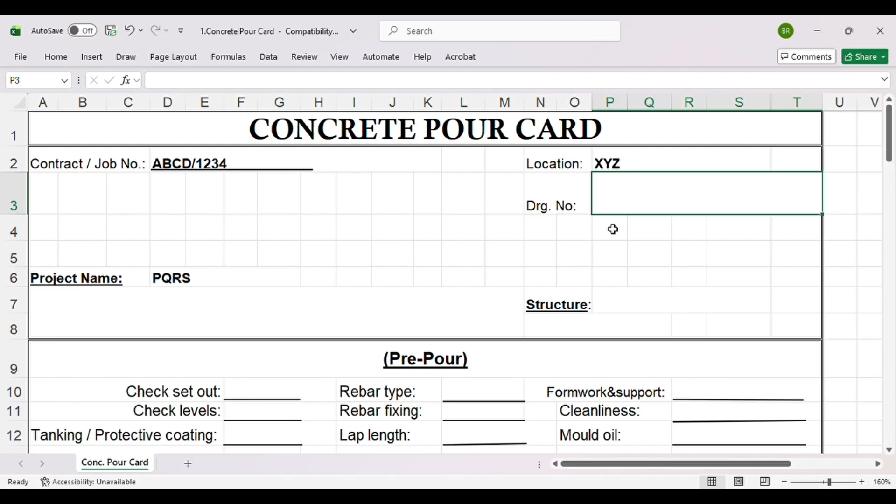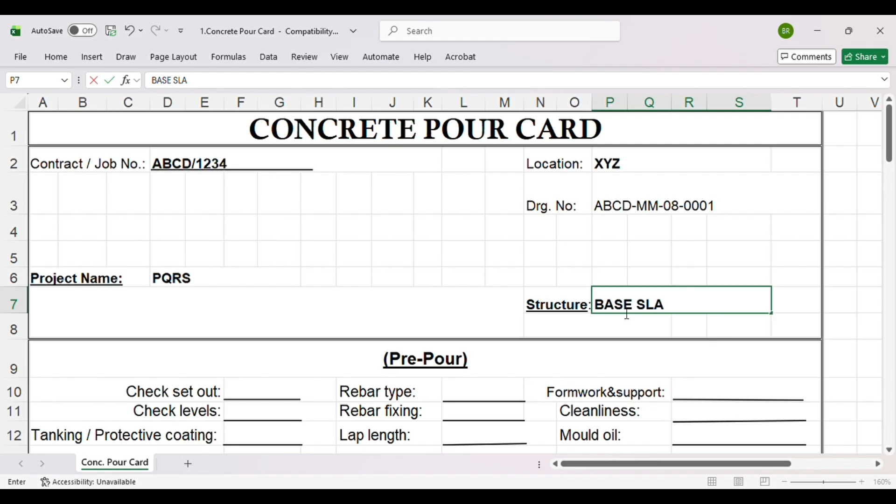First, contract / job number. We cannot put the exact contract and job number, so this will be, for example, A, B, C, D. Contract number and job number is 1, 2, 3, 4. Location may be X, Y, Z, and project name P, Q, R, S. This is also for example. Then drawing number is also for example A, B, C, D hyphen MM hyphen 08 hyphen 0, 0, 0, 1. Then structure we will take as base slab of culvert, for example.

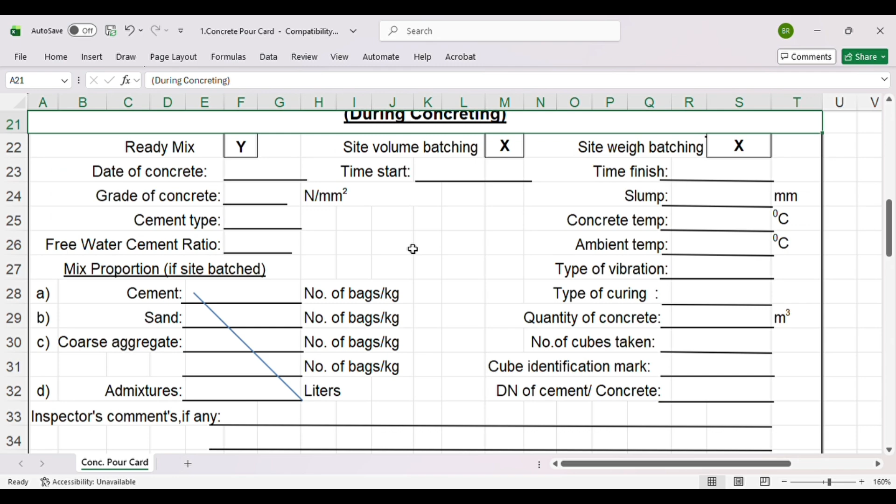Then there are three stages, as I already told: pre-pour, during concreting, and post-pour. So pre-pour, check set out. It will be checked; this checking is required. Then check levels, checked. Then tanking, because this is pre-pour, here it will be not applicable. Same, vapor barrier also not applicable. Then expansion joint filler, because this is first pour, it will be not applicable. Waterstops, if it is not required, then not applicable.

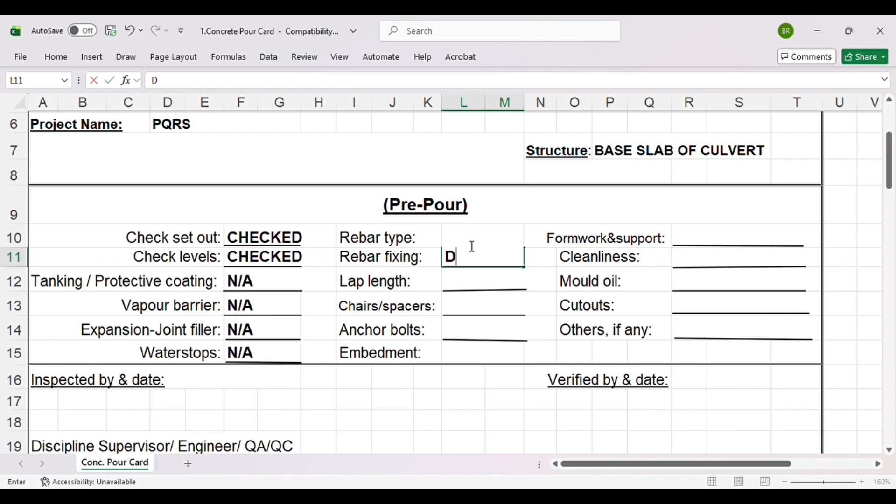Rebar type will be HYSD, and then rebar fixing done. Lap length, if it is more than standard steel length, then lap length provided, or if it is less, then it will be not applicable. Same, chair and spacer, not applicable. Anchor bolts, if applicable, then provided. Or embedment, if it is not applicable, then not applicable, otherwise done.

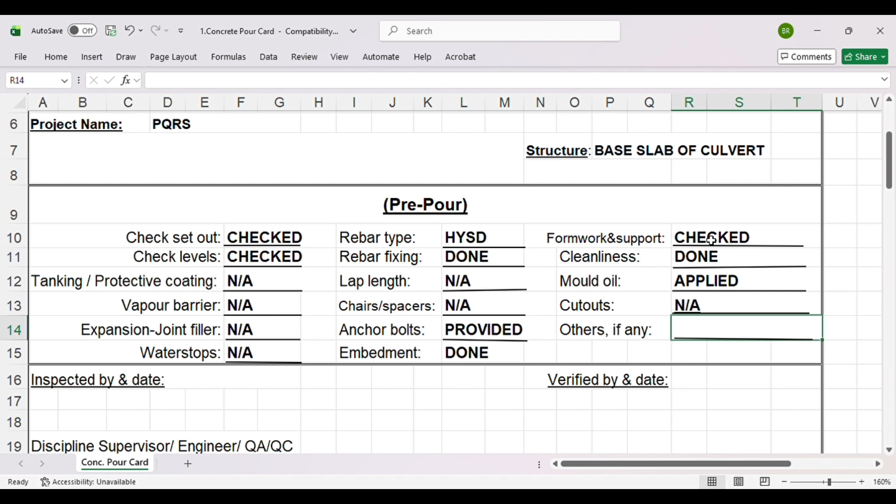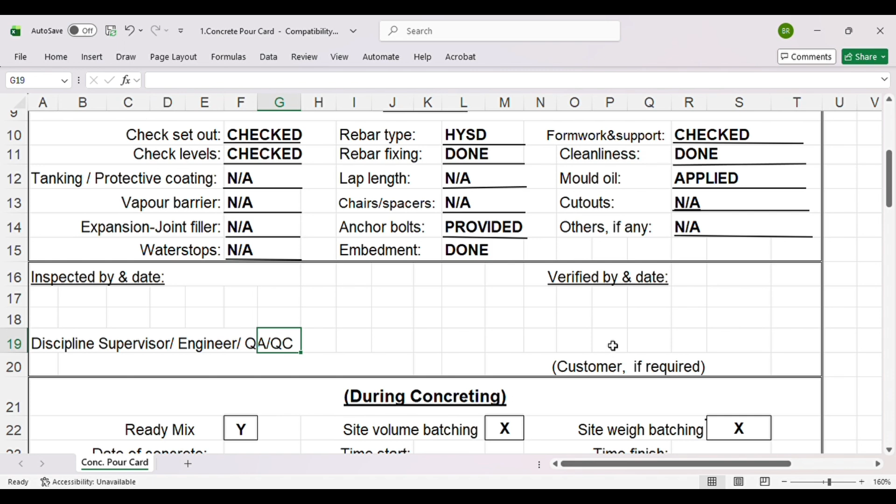Then formwork and supports, obviously required, checked. And cleanliness is done. Then mold oil applied. Cutouts, if there is no cutout, then not applicable. And any others, if not applicable, then not applicable. So this was pre-pour. It may be inspected by anybody, either supervisor, engineer, or QAQC. All three can sign here, or any one of them can sign here. Then if verification is required by the client or customer, he will sign, otherwise not required.

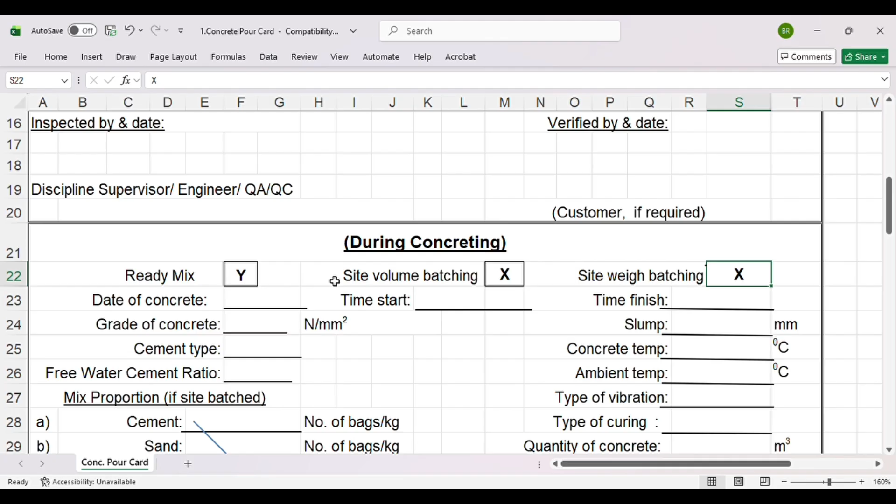Then during concreting, ready mix. In most projects only ready mix concrete is required. Site volume batching and site weigh batching are not required, but it depends on project requirement. Date of concrete, for example, 01/01/2026, 1st January 2026. Then time, 10 AM. Time of finishing, if it finishes within half an hour, then 10:30 AM. And grade of concrete, for example, 40 Newton per mm square.

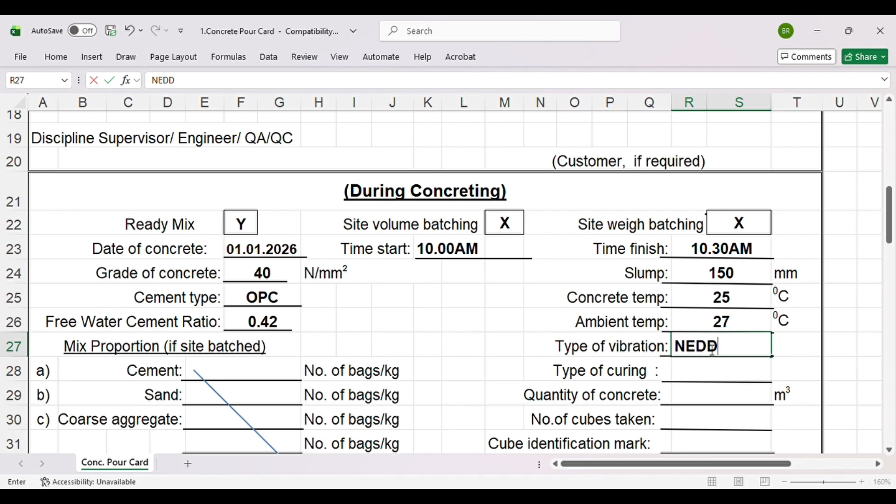Cement type OPC, and free water cement ratio 0.42. These figures are all taken as an example. Then slump, it may be 150. And concrete temperature, in the month of January, concrete temperature is required to be less than 32 degrees Celsius, so for example, it is 25. Then ambient temperature may be 27. Type of vibration, in most cases a needle vibrator is used, so needle. And type of curing, water, whatever is applicable in the project.

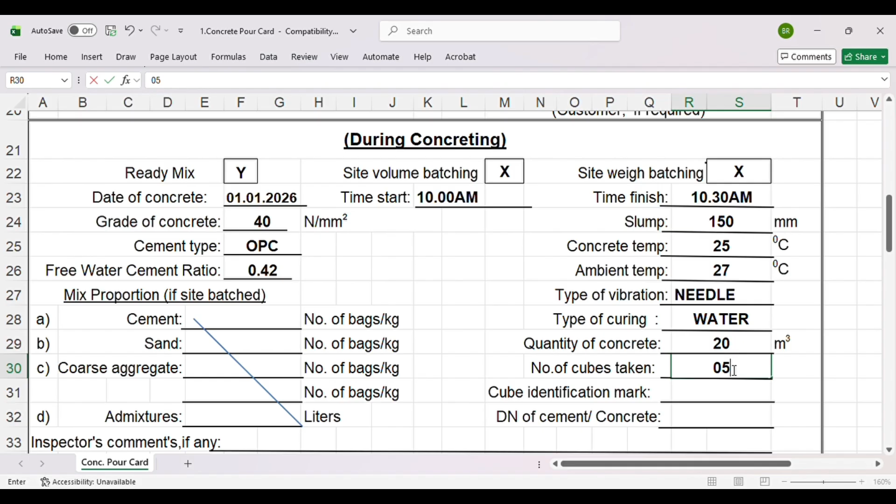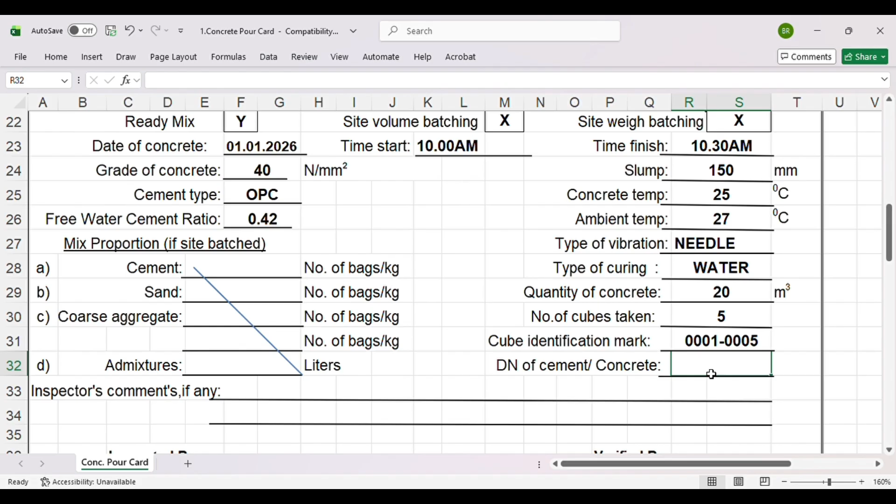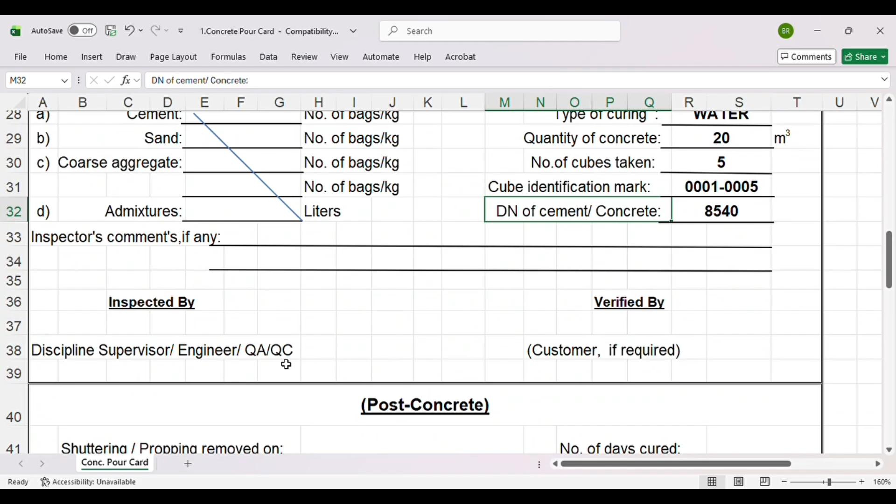Quantity of concrete, for example, 20. The number of cubes taken: normally up to 30 cubic meters one set is taken, so for example, one set of 5. Cube identification, for example, this is the first day, so we'll take 0001 to 0005, 5 cubes. Delivery note, for example, 8540. This is from the batching plant. So this is during concreting. Then anybody can sign here, and if required, the client can also verify. If not required, then not necessary.

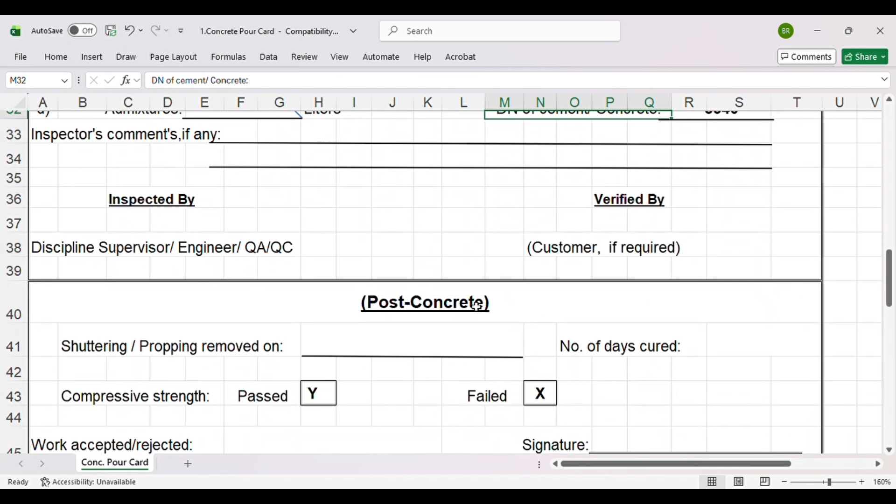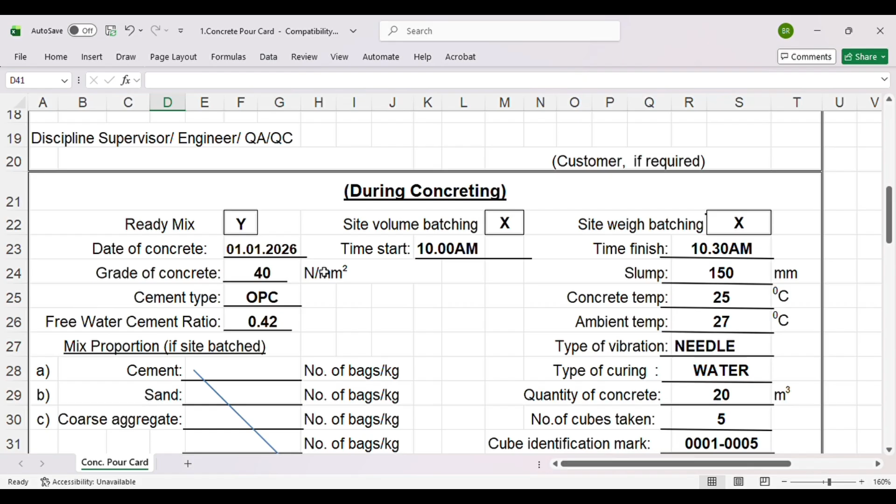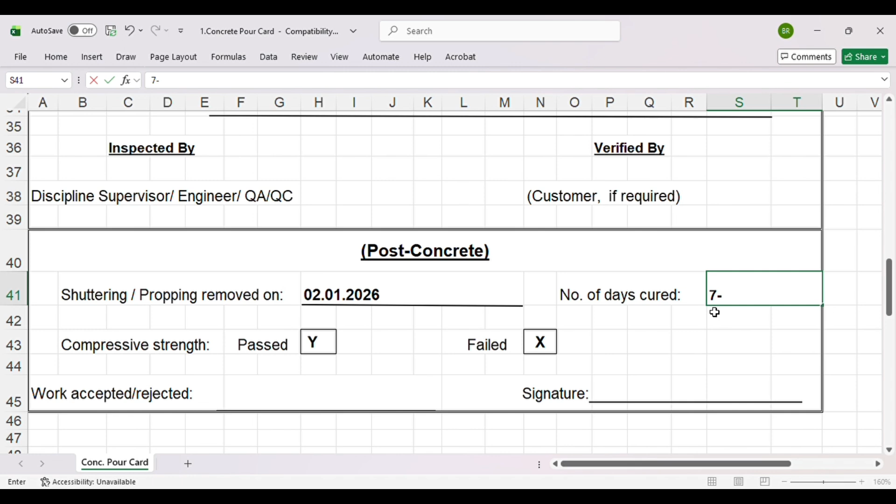Coming to post-pour inspection. Shuttering, propping removed on: concrete is done on 1st January, and if it is a vertical side, then it will be 24 hours, so it will be 2nd January 2026. And number of days cured, it will be 7 days; it is a universal requirement, minimum 7 days curing.

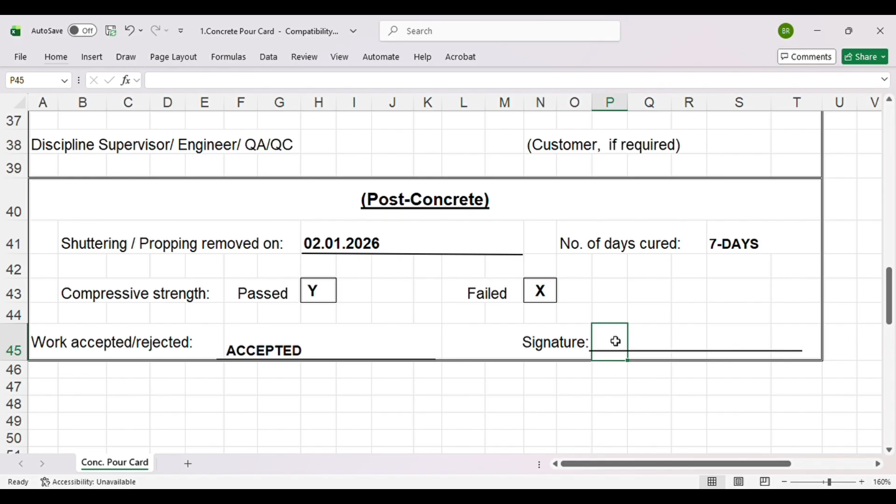Then compressive strength, if it is passed, then Y. If it is failed, then X. And work accepted or rejected: if it is accepted, then accepted. And finally the signature, either by QAQC or client, but here it is QAQC who is the final inspecting authority. So this is all about how a concrete pour card is filled.